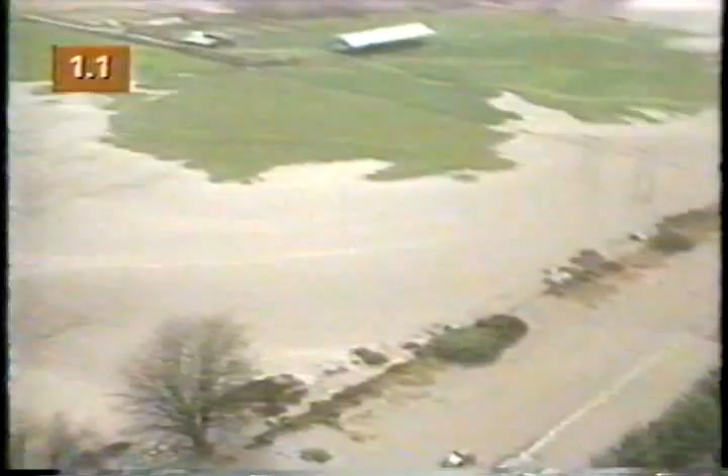Disasters are the most dramatic causes of soil erosion. Many tons of soil can be washed away and carried downstream. Trees and plants which hold the soil in place are torn up by wind and floodwater. We see vast areas of forest land destroyed by firestorms. Such devastation hits the headlines.

Communities and governments jump into action to remediate the damage, and large sums are invested in preventing similar disasters occurring in high-risk areas. Less obvious and less dramatic is the natural erosion caused by the continuing effects of rainfall, wind, and the flow action of streams and rivers. Over time, it has created some spectacular formations. Natural erosion takes place gradually and insidiously. We may never control it entirely.

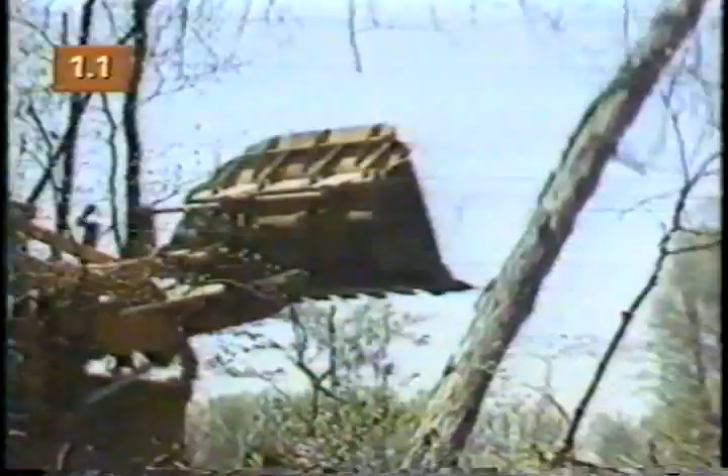Widespread and more rapidly damaging than natural erosion is the additional erosion caused by man. This is the accelerated erosion caused by earth-disturbing activities in agriculture, mining, logging, road building, and new home development. Construction work almost inevitably involves land clearing, which leaves the soil disturbed, stripped of vegetation, and therefore susceptible to erosion. It is accelerated erosion that is our greatest concern, as it depletes our life-depending soil.

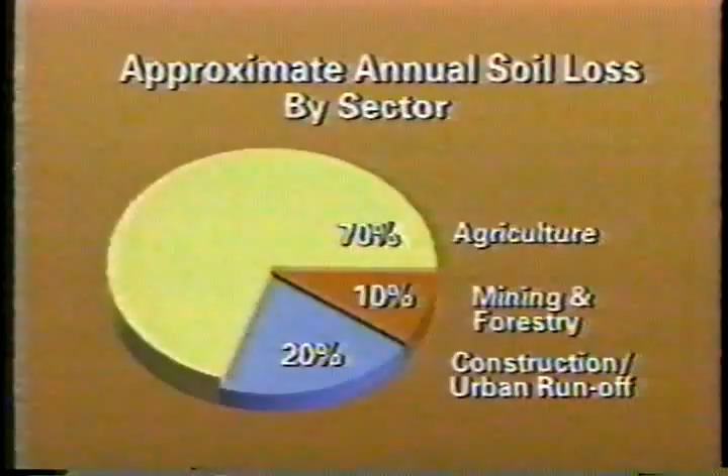The U.S. Department of Agriculture Soil Conservation Service estimates that 3 to 4 billion tons of soil a year are lost from United States land through erosion. Of this total soil loss, 25 to 30% comes from non-agricultural sources. Although construction is not the largest contributor in terms of volume, the rate of runoff from construction sites can be the highest of all land-disturbing activities, and so can the rate of soil loss.

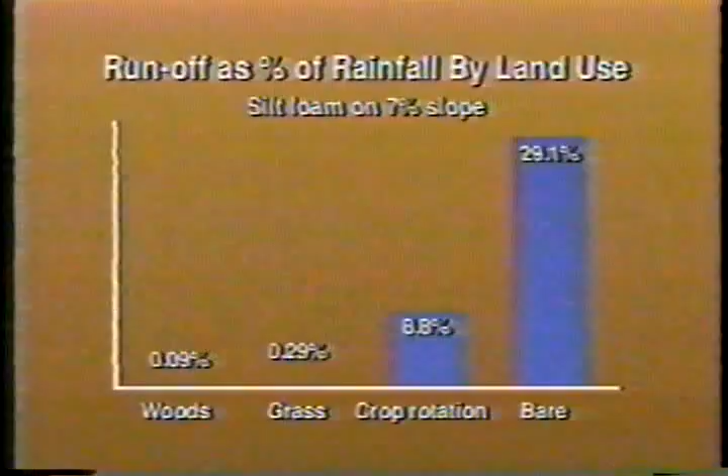Erosion on such a scale reduces the soil's ability to support vegetation, the source of food, oxygen, and building materials. It also threatens wildlife habitats and recreation areas. Sediment resulting from erosion provides a substrate for toxic chemicals, which are carried into water supplies. Sediment accelerates the siltation of waterways and navigable waters. Dredging these costs the U.S. Army Corps of Engineers about $500 million each year.

The EPA estimates as much as $13 billion of taxpayers' money is spent on mitigating the off-site impacts of erosion every year. Not surprisingly, developers, cities, agencies, or other land-disturbing groups may now be faced with large costs to comply with tightening federal and state regulations. Obviously, it's preferable and more cost-effective to control erosion than to pay for its consequences. In this video, we shall look at the erosion process and then at established practices for its mitigation.

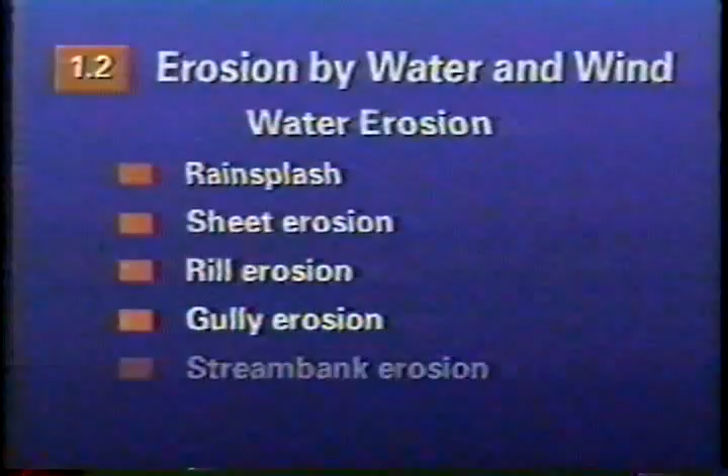Erosion occurs where soil particles are detached by the actions of water and wind. Eroded material is suspended in water as sediment and deposited through sedimentation. There are basically 6 types of water erosion: rain splash, sheet erosion, rill erosion, gully erosion, stream bank erosion, and mass wasting. Rain splash is the most important detaching agent. Raindrops striking a bare earth surface break up aggregates and dislodge soil particles.

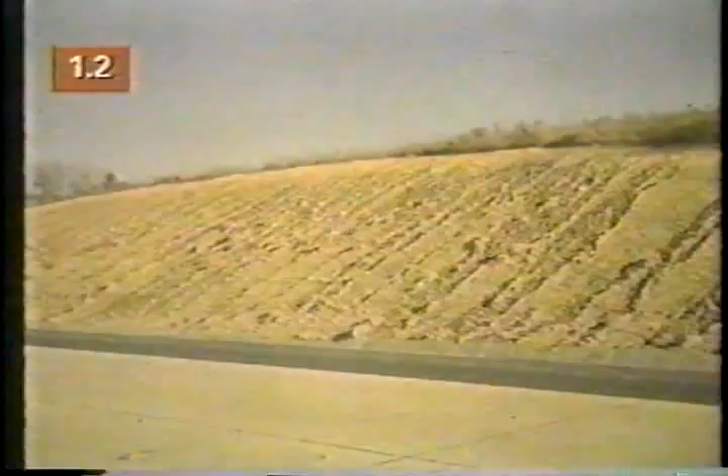Sheet erosion occurs as runoff water moves across the surface of the ground, detaching a thin, uniform layer of soil. While often unnoticeable, sheet erosion is a common and very significant form of erosion. Excessive runoff and steepened topography may produce a network of small channels called rills. Research suggests that rill erosion accounts for the greater part of sediment carried down hillsides. But rills are ephemeral and can often be eliminated by good surface treatment. Left untreated, rills can develop into deeper channels, forming gullies.

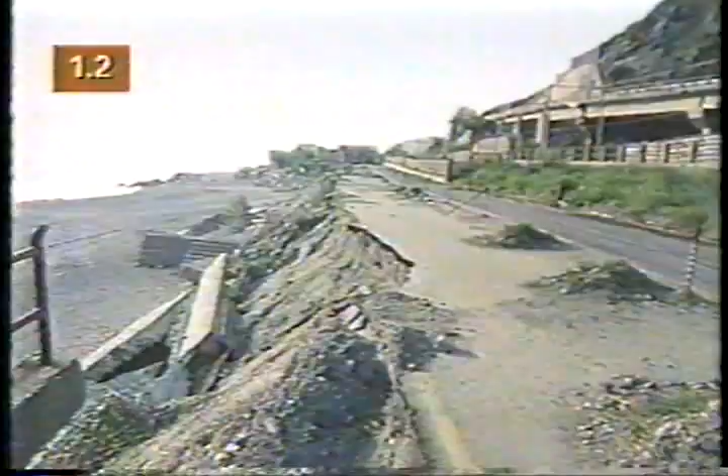Tributaries and stream banks are particularly vulnerable to erosion, especially where the velocity of the flowing water is high and the resistance of the bank materials low. Landslides, mudslides, or mass wasting of shorelines, although less frequent, transport great quantities of sediment into water bodies. From rainfall splash through mass wasting, the amount of water velocity and energy increases. This means the methods used to control erosion are going to be more extensive and more expensive. Erosion is more easily controlled at the low energy types: rainfall, sheet, and rill.

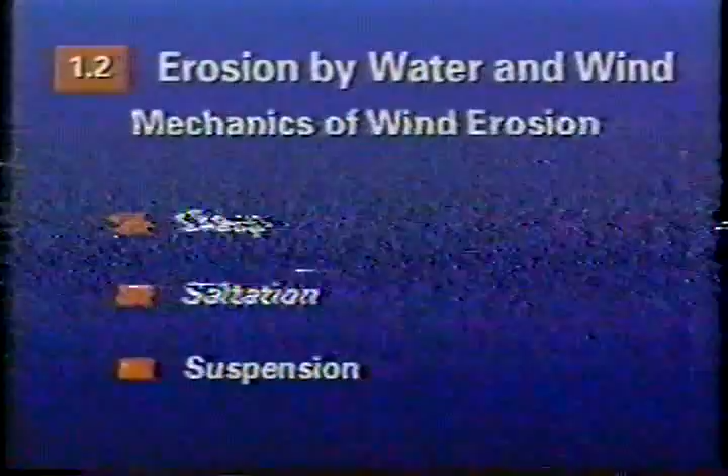There are three mechanisms associated with wind erosion. Coarser grains roll along the surface in an action known as creep. At higher wind velocities, they bounce along the surface, saltation. Finer particles, silts for example, are picked up and resuspended in the air for longer periods of time. Methods to prevent soil erosion or reduce sedimentation are known as conservation practices or best management practices, often referred to as BMPs.

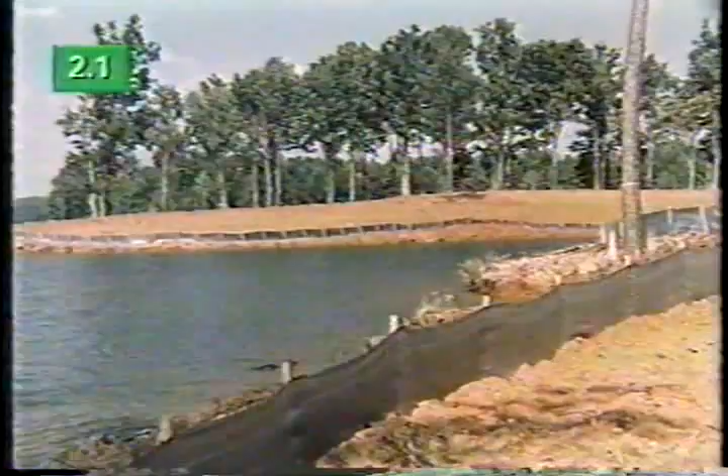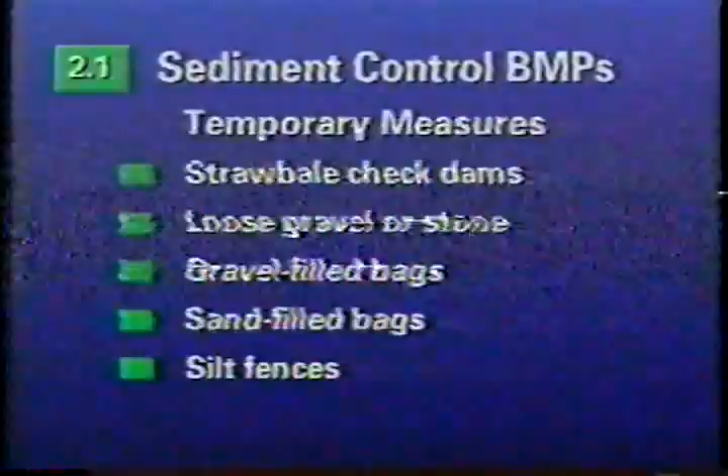Once erosion has occurred, sediment is produced. Temporary methods to control sediment include straw bale check dams, loose gravel or stone, gravel-filled bags, sand-filled bags, geotextile silt fences. Straw bales are one of the oldest practices for controlling sediment, but to be effective, they must be installed correctly and then be inspected and maintained. Bales should be trenched in place, placed on their edges, with the ties off the ground and staked with wooden stakes.

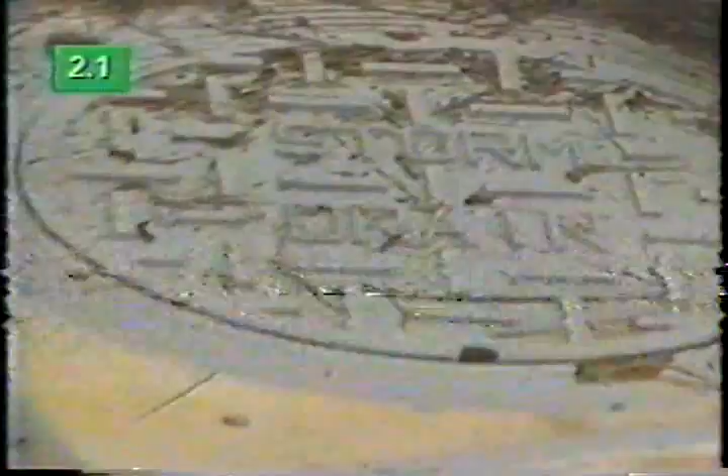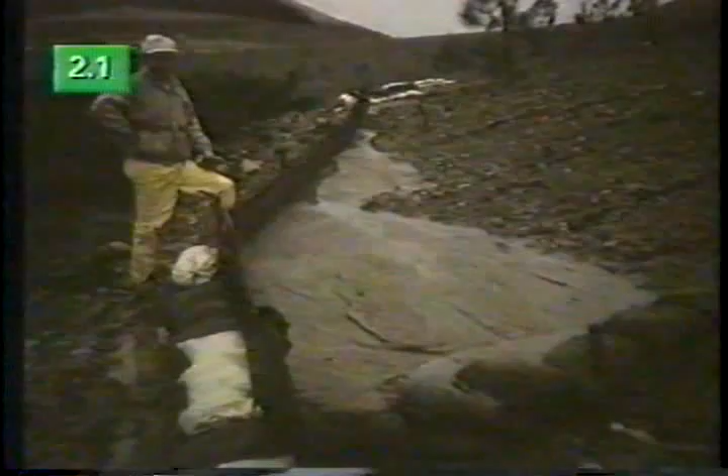Gravel inlet filters can be constructed using cinder blocks laid on their sides, with the open area covered by a screen. Gravel is then placed against the screen to let water pass through, while the sediment is retained. Burlap bags filled with gravel allow water to flow through and the sediment to settle out behind them. The loosely knit system of bag and gravel serves as a filter. On the other hand, geotextile bags filled with sand are effective in blocking the flow of water, but less effective in allowing the water to percolate through.

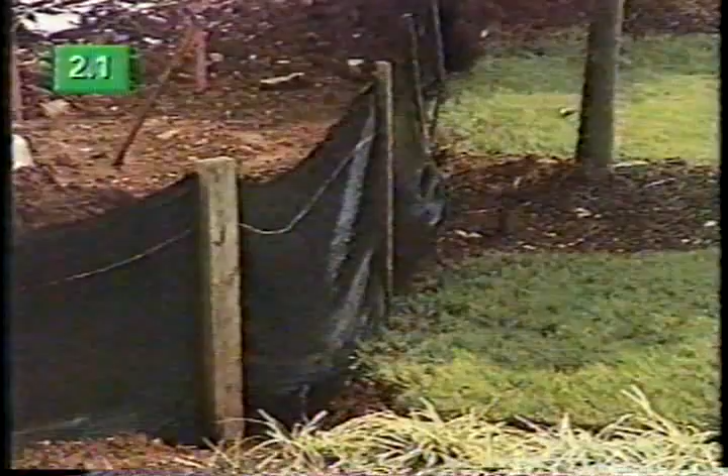Geotextile silt fences are designed to reduce soil sediment runoff. This one from Amoco is made of woven, inert polypropylene and is self-supported by wooden stakes. Water is allowed to filter through, while suspended sediment particles settle out behind the fabric, preventing soil movement from the site.

Silt fences must be installed according to manufacturer's instructions to prevent sediment flowing underneath. This involves digging a trench, burying the bottom of the fabric in the trench, and backfilling it. For inlet protection, they may need reinforcement.

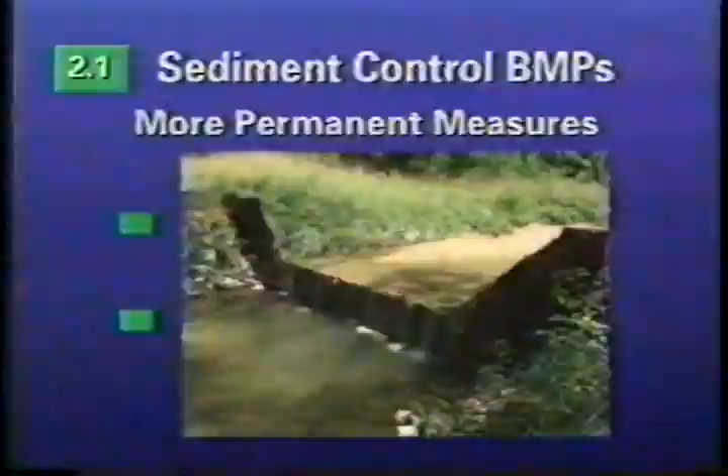More permanent structural methods of sediment control include check dams constructed from logs, rock, concrete, or gabions, all designed to reduce runoff velocities and trap sediment. Detention ponds hold stormwater and release it slowly. Retention ponds hold water for longer periods, allowing sediment to settle out. Catch basins are good practice on a construction site.

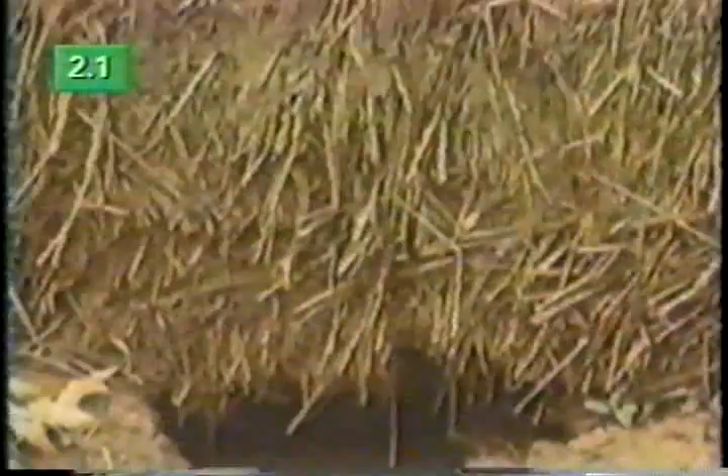As with all sediment-control BMPs, continued maintenance is necessary for their efficient operation. This means periodically removing and distributing or disposing of accumulated sediment. Keeping soil in its place and out of sedimentation devices is erosion control. And the simplest, most cost-effective measure to control erosion is to maintain a cover on the soil surface. The most effective way of accomplishing this is by establishing vegetation.

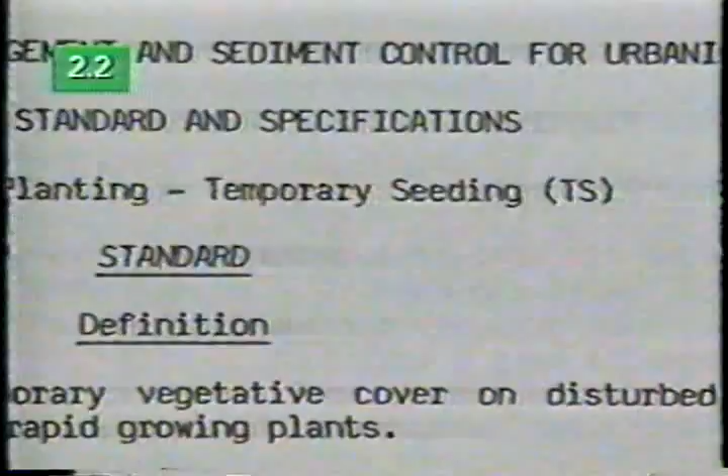Vegetation has three main functions: to intercept and reduce the energy of rainfall impact, to reduce runoff velocity, filter out sediment, and increase infiltration of water into the soil, and to hold soil in place with roots. Certain procedures should be followed, including the addition of fertilizer and soil amendments to promote vegetation establishment. These procedures should be based on the results of a soil test and related to the type of vegetation selected for long-term establishment.

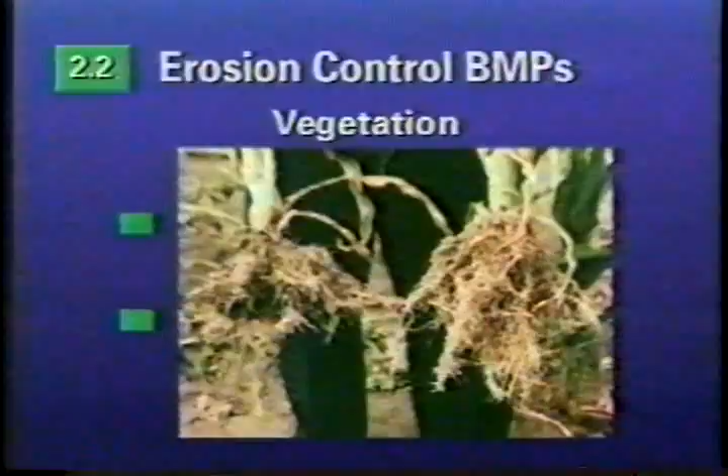Sometimes the soil's limitation to grow vegetation is related to its structure. This is the case with soils underlain with impervious layers or hardpan, which restrict root development. Mechanical means, such as deep ripping, can be used to break up compaction, but at least one chemical method, Agri-SC from 4-Star Services, has been demonstrated which makes compacted soils friable and moisture in the soil more accessible to plants. This soil treatment is relatively inexpensive and can be applied by any conventional agricultural spray equipment.

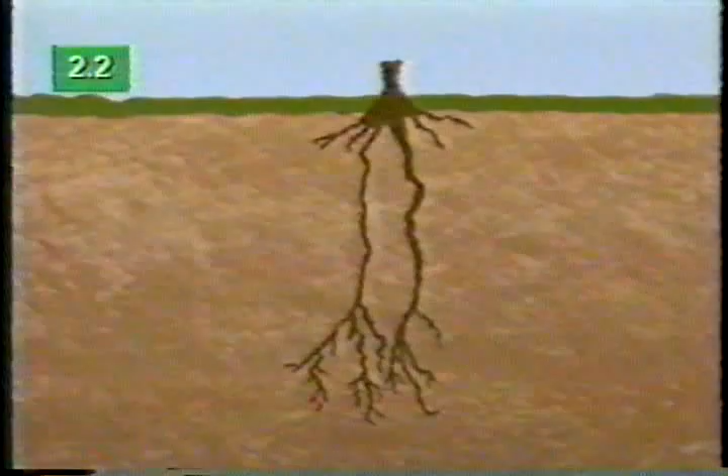Soil bioengineering is the practice of using trees, shrubs, and other living plant material to structurally reinforce the soil. These need careful selection. If erosion is deep-seated, those with long roots will give greater support. If erosion is superficial, those with matted shallow roots will be preferred. When mature, the canopy can protect soil from rainfall, while the roots hold the soil fast.

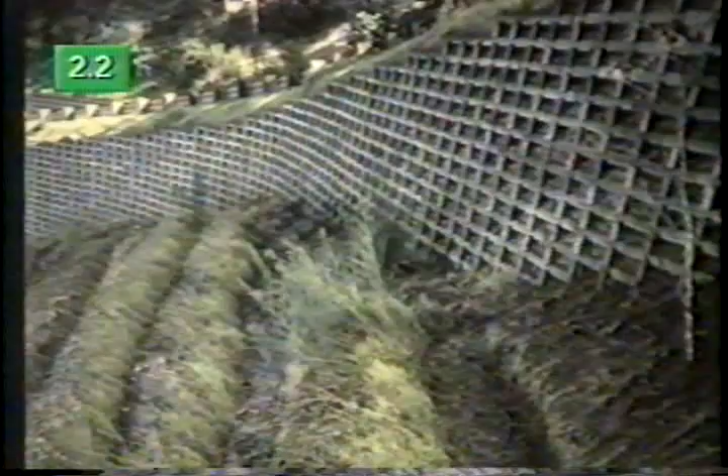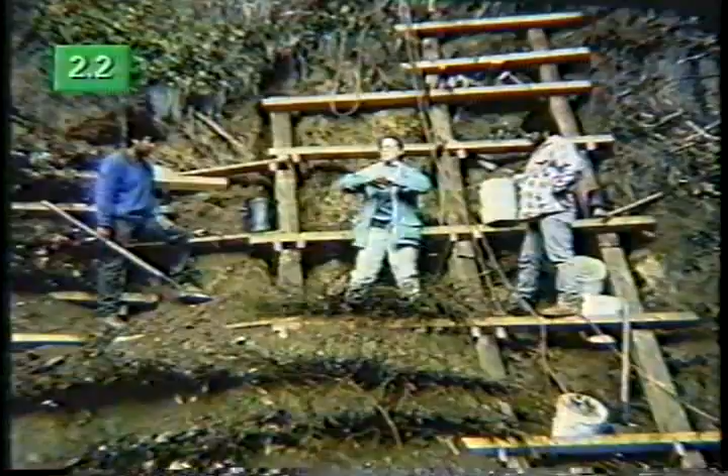A traditional way of controlling shallow erosion is live staking. Typically, willow stakes cut from dormant plants grow well in moist soil, and some thrive on road fills or along gullies. Traditional wattling also makes use of available materials. Cigar-shaped bundles of quickly rooting live brush can be staked in shallow trenches cut at intervals on contour. Stakes can also be of live material. Biodegradable geotextiles can also be incorporated into the system, along with grasses and other plants. In soil bioengineering, materials may cost little, but it is skilled work and labor-intensive, and periodic inspection and maintenance are essential.

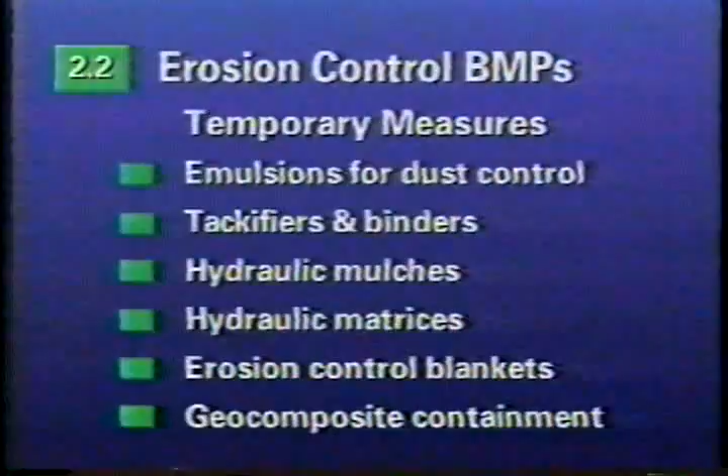Temporary erosion control measures are often necessary to protect the surface. These include emulsions for dust control, tackifiers and soil binders, hydraulic mulches, hydraulic matrices of composite materials, erosion control blankets, and geocomposite containment systems. Usually as a measure against wind erosion, organic byproducts or acrylic polymer soil stabilizers seal the surface or bind soil particles into aggregates. Wind-blown sediment can be a major violator of clean air laws.

Coal dust from this storage pile is being treated with Soil-Sement, a binder made of a blend of acrylic and polyvinyl acetate made by Midwest Industrial Supply. The binder produces a pliable surface resistant to wind action. Another application for Soil-Sement is to control erosion and dust in desert areas. After the final grading and stabilization, rain will not destroy the grading along the firm surface so long as the soil sealant remains intact.

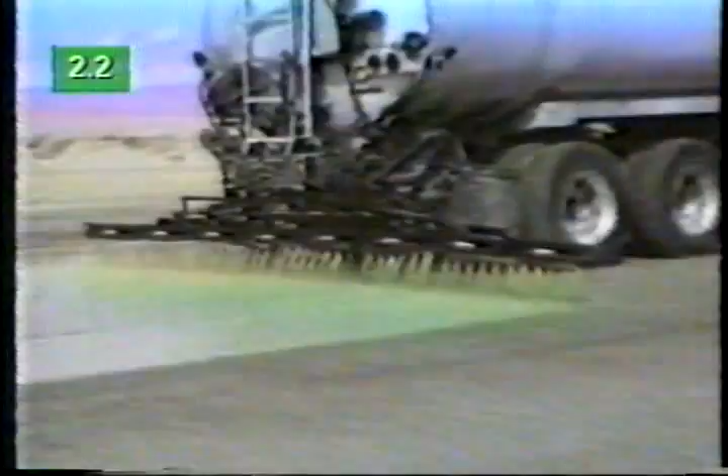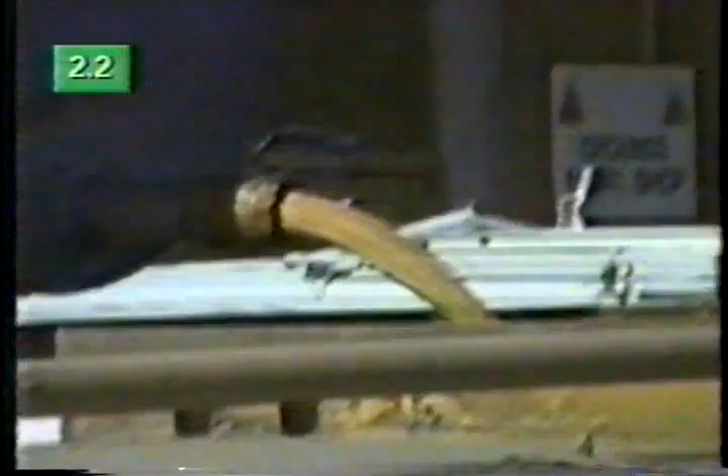Dust on unsurfaced roads, like this mine haul road, or helipads and airstrips, is not only a problem, but a safety hazard. Here we see Road Oyl, a soil stabilizer from Soil Stabilization Products, being used to provide a strong bonded surface. This is more economical than asphalt and more rapidly applied. Road Oyl is an emulsion made from modified natural resin, which is added to water and diluted according to application needs. A single coat sufficed to stabilize the helipad, but several coats were applied to the landing strip.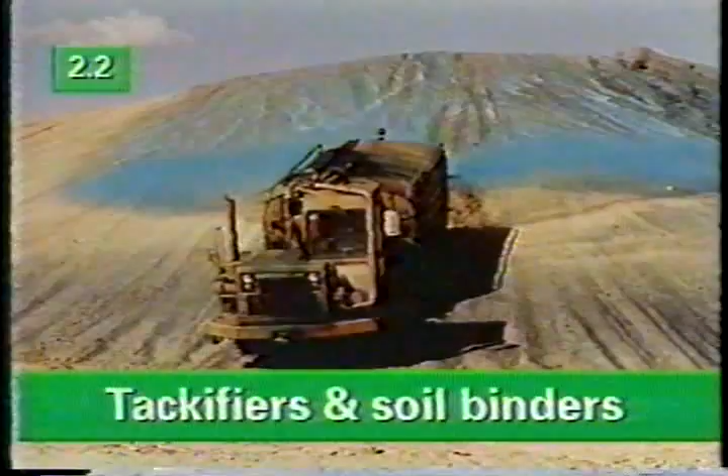Here we see a dyed liquid copolymer binder being sprayed to hold down the fly ash from the nearby coal generating station. This product is Soil Master from Environmental Soil Systems. When it's mixed with water, it bonds with the ash particles to form a water-resistant membrane which stabilizes the surface against wind erosion.

On quite a different site, this binder is used to prevent the sand from blowing onto the main highway. It was also used to stabilize the nearby dunes. With this device, the Soil Master stabilizer was sprayed on copper mine tailings. When diluted with water, binders can be used as tackifiers by themselves or with mulching.

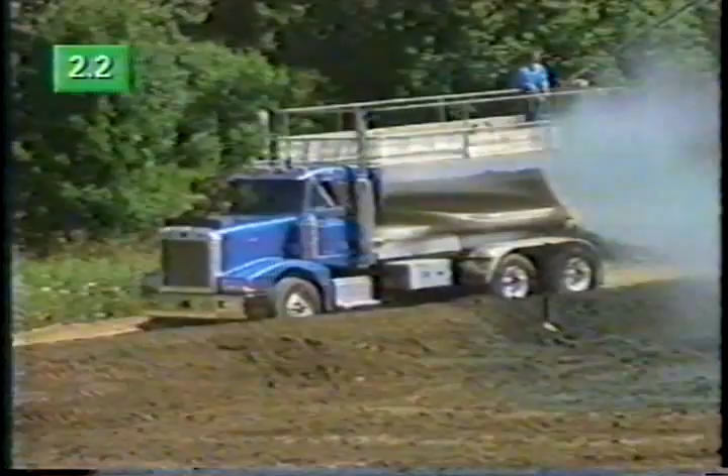Hydraulic mulches can be made of recycled paper, wood fiber, cotton waste, or other biodegradable materials. This is an economical way of delivering seed, mulch, and fertilizer. Mulch also protects the surface from rainfall impact, increases moisture retention in the soil, and moderates soil temperature.

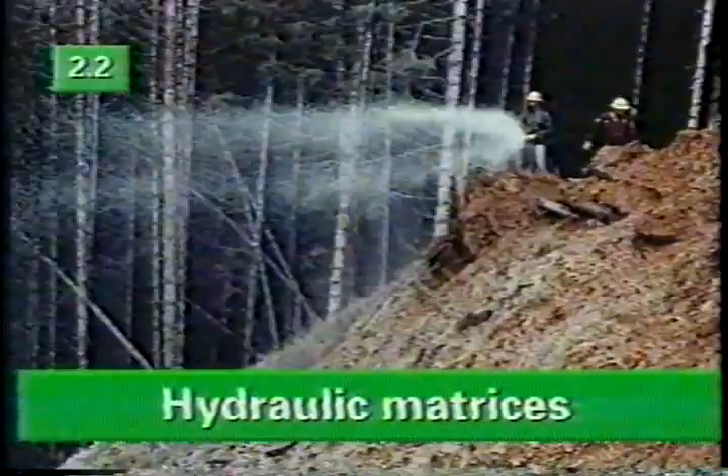In some erosion control projects, specifications call for a particular blend of materials. Hydraulic mulches, soil binders, and other amendments may be combined to produce a composite matrix, which is hydraulically applied with seed to provide a high level of protection.

A typical example is the emergency erosion control effort following the Oakland, California firestorm. Here, a combination of recycled paper mulch, wood fiber mulch, acrylic copolymer, and seed was applied to over 500 acres of the burn area, with successful results.

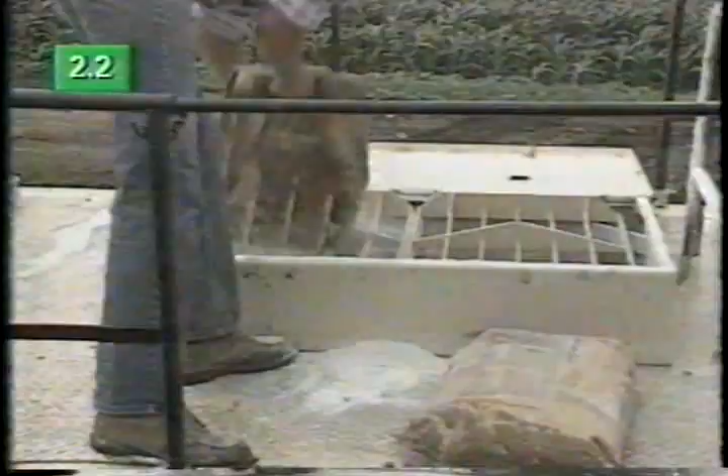Another example of a hydraulic matrix used here on a landfill is Airtrol, natural U.S. gypsum plaster, which can be mixed with seed, fertilizer, and water to form a cementitious binder. This matrix provides a protective crust-like cover of about 1/4 of an inch, which controls water and wind-induced erosion and holds seed in place. The matrix retains moisture in the soil and lowers soil temperature.

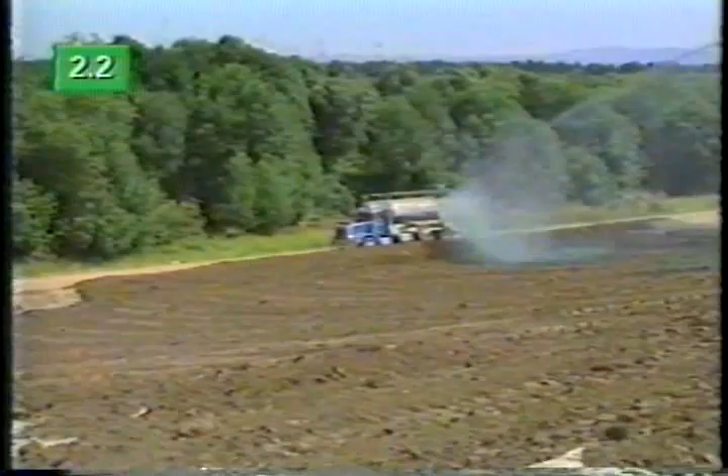Applying seed, fertilizer, control emulsions, tackifiers, soil binders, hydraulic mulches, and matrices requires specialized hydraulic seeding machinery. Although the principles of application are simple, equipment has become quite sophisticated. GeoQuip's hydroseeder boasts quick-release camlock hose couplings as a precaution against clogging, and a built-in fresh water tank so the main tank can be flushed out on site.

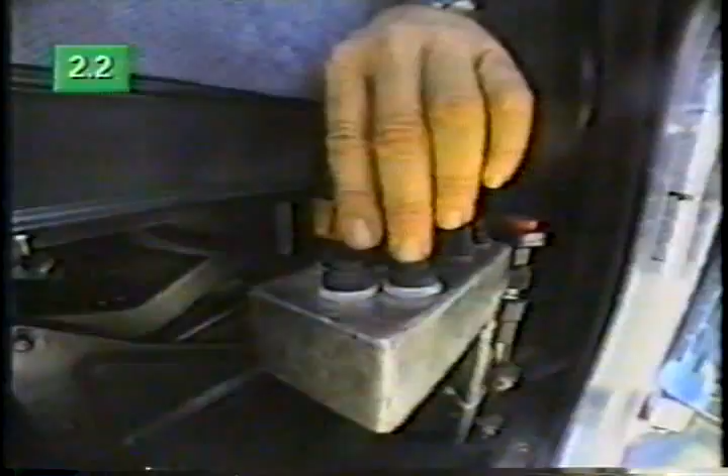The driver can run the side hose through electronically controlled hydraulics. Looking through his rearview mirror, he can see the nozzle, aim it, and conduct the operation himself without getting out of the cab. Erosion control blankets are rollout devices, which can be placed in two categories: blankets made of natural, biodegradable materials, and blankets made of synthetic, non-biodegradable materials.

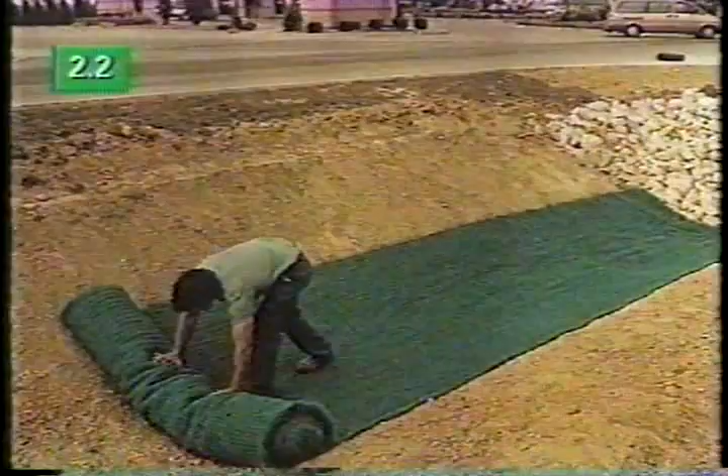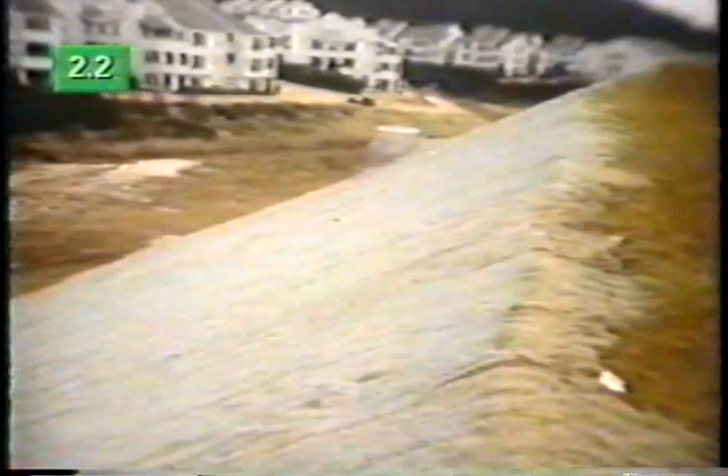One of the oldest forms of erosion control blanket is of natural jute. Belton's GeoJute is an open weave fabric which allows light to enter and plants to grow through it. Like most blankets, jute is stapled to the ground with staples, pins, or wooden stakes. The blanket drapes to follow the land contours and lasts while the vegetation establishes itself before it degrades. The open weave allows hydroseeding to be applied after as well as before installation.

Coir, woven coconut fiber, is another natural material used in the erosion control industry. We are looking at GeoCoir DeKoWe, again from Belton. It can be woven into different weights and meshes. Much tougher than jute, coconut fiber lasts from 4 to 10 years before it degrades. Coir can be used to support stream embankments and channels and to hold the seeds in place until the plants take over the support.

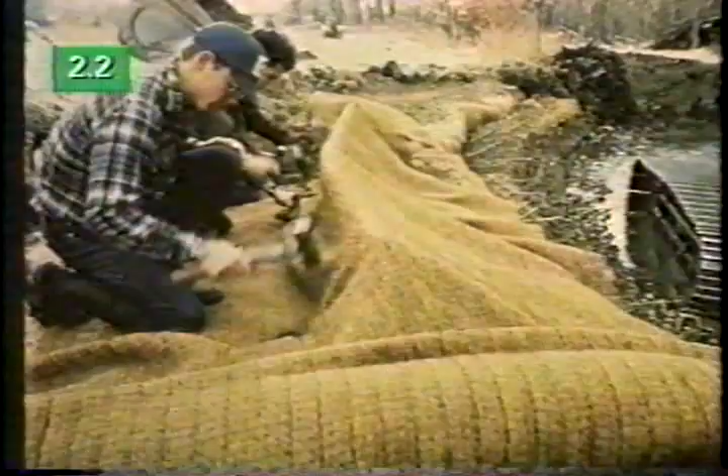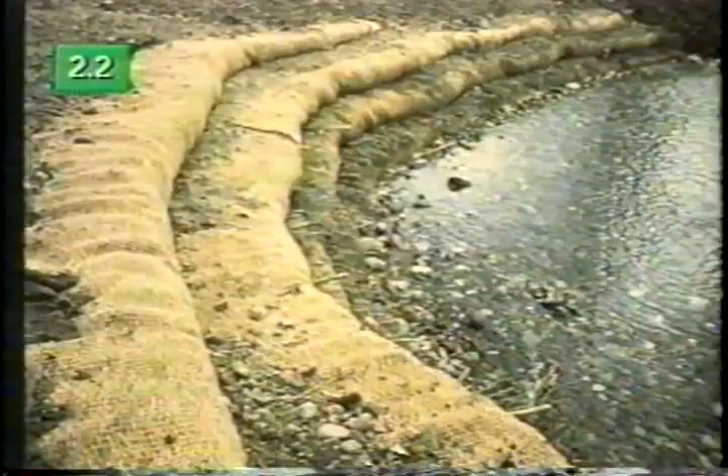Here, a high-strength coconut fiber geotextile from Bonterra America is used in the construction of a retaining wall which follows the bends in a stream. Using a plywood form, the wall is constructed in 18-inch lifts, extending 4 feet into the bank. Willow cuttings to be planted through the fabric will be well established by the time the product degrades.

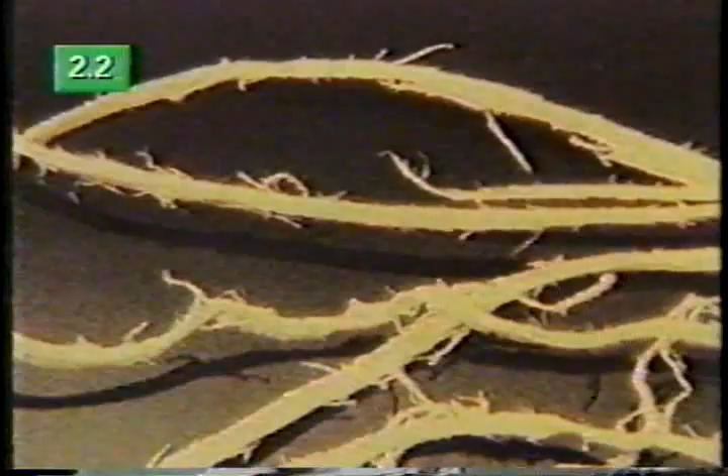This Curlex blanket from American Excelsior, at work on a holding pond, is made of curled wood encased in a photodegradable plastic netting. The wood fibers control erosion and promote growth by holding the seed in place. In this application, the contractor made plantings through the material after installation.

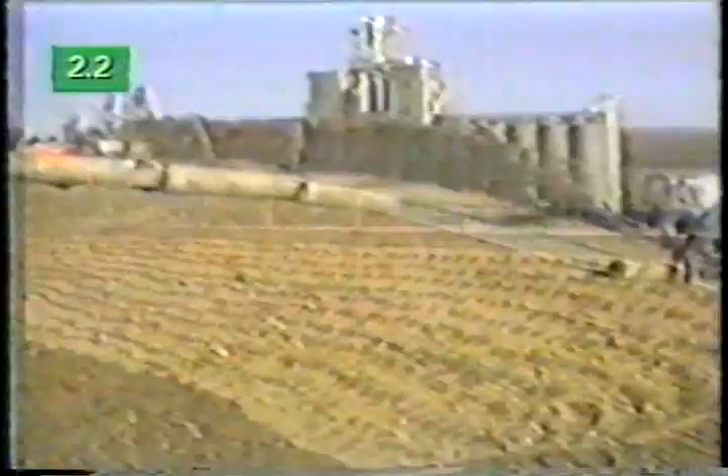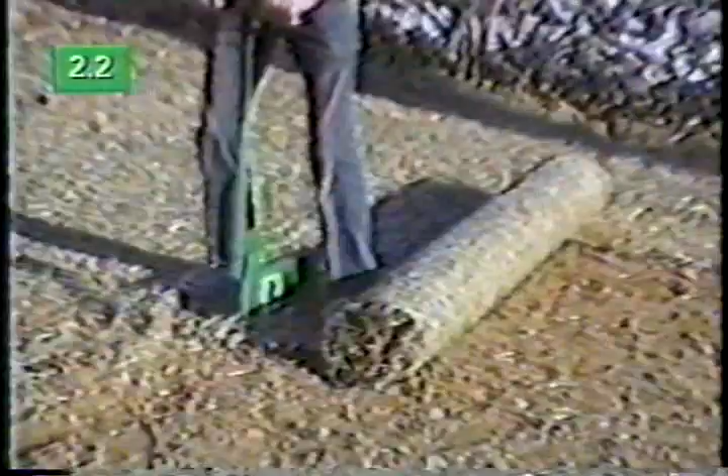Installing erosion control blankets is a relatively fast and unskilled operation. These North American Green straw blankets are being used to cover an embankment. While on this 80-foot slope, double-netted straw blankets have been installed to prevent erosion and sediment deposition on the railway lines below. Here, blankets laid on landfills have been revegetated to prevent underlying drainage systems and trash being exposed.

In this application, erosion control blankets were used around the site of a new supermarket. Two grades of Bonterra erosion control blankets were selected. A straw blanket was placed initially and then covered by a heavy woven coconut fiber geotextile. This was because the site was steep and exposed to frost shear and severe winter weather. The greening began with the arrival of spring and the wildflowers that were part of the specified seed mix.

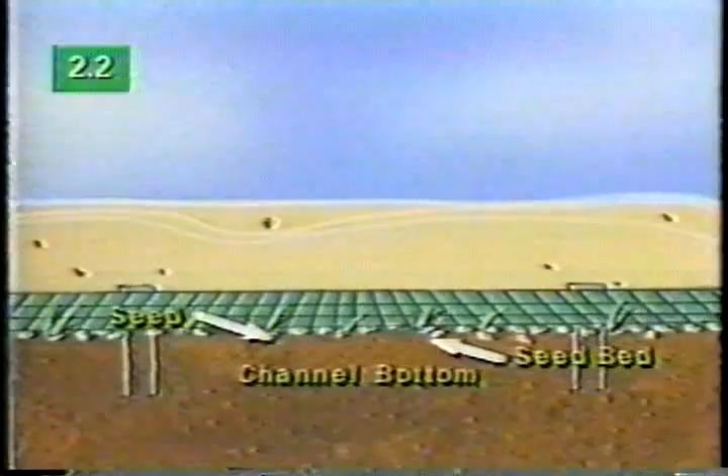This blanket from North American Green is not constructed of natural fiber. It is a synthetic flexible channel liner designed to remain as a protection against scour on the channel bottom. Laid over the seeded channel bed, the liner protects seeds and soil from being eroded by water flow. Once established, the roots remain entwined in the non-biodegradable mesh.

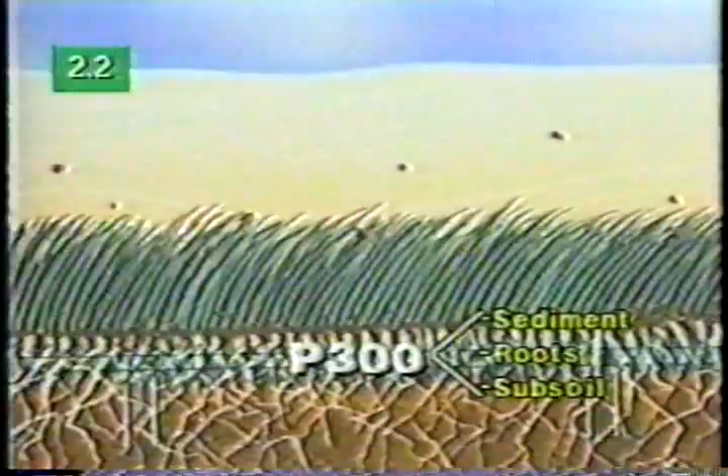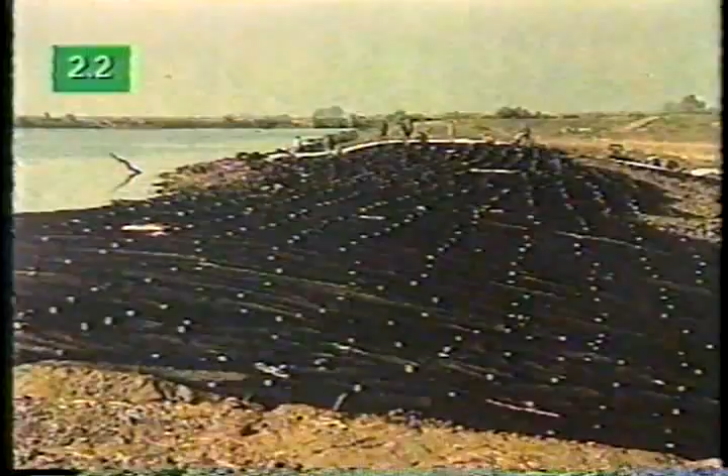On the shore of this dike, ripe barley has its roots anchored in Akzo Enkamat, a 3-dimensional matting of heavy nylon monofilaments fused at their intersections. 8 months before, this matting was pegged down on badly eroded earth, seeded, and filled with friable topsoil.

Enkamat is a root reinforcement matting, which also resists the shear forces created by high-volume discharges. It is used to promote vegetative cover, to slow water flow, and control erosion in ditches and stormwater channels. It is also installed on embankments and other steep slopes for hydroseeding.

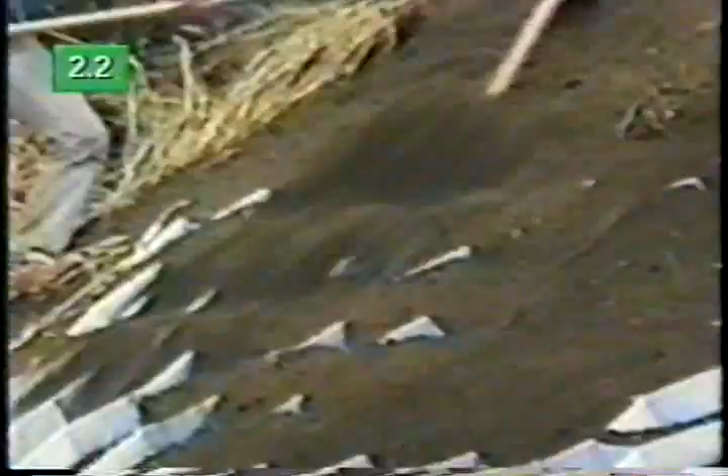Wherever greater stabilization is necessary, cellular geocontainment systems can be used. Seen here is Akzo Armater, a 3-dimensional semi-rigid matrix made of non-woven polyester fabric. The cells can be filled with soil, sand, or aggregates according to the application. On this site in British Columbia, the cells are filled and planted with native spruce and pine trees.

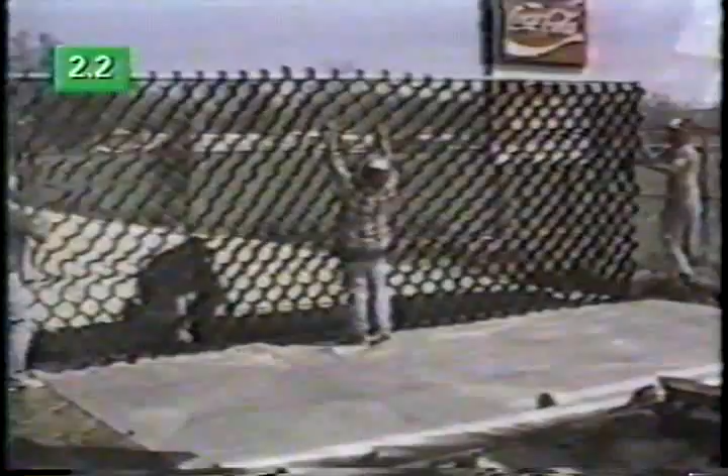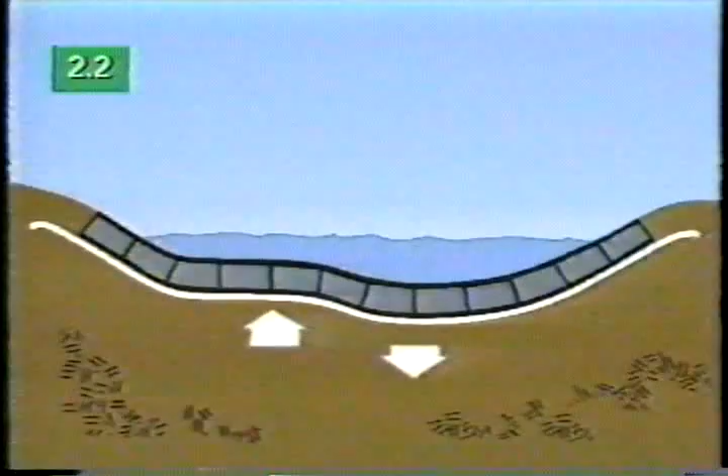GeoWeb from Presto is a containment system made from welded polyethylene plastic strips. Again, sections are flexible for transportation and placement, but once filled, the 3-dimensional cells confine and reinforce the fill to form a structural composite. The cellular structure will conform to contours, but prevent flanking or movement of the infill. Cell walls allow normal drainage, but hold the infill material in place, forcing water to flow over the protective system to prevent erosion.

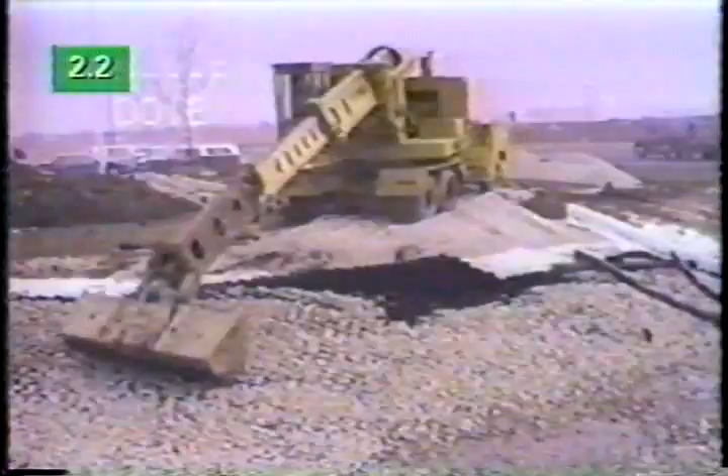For low water flow velocities, the infill can be of native soil, later vegetated to give natural cover. For medium flow velocities, in channels for instance, infill can be of crushed rock. When using geocomposite containment systems, most channel installations require a geotextile to be laid between the substrate and the composite. Where there is hydrostatic pressure, the geotextile directs the water to open cells that have been filled with gravel, allowing the water to drain into the channel.

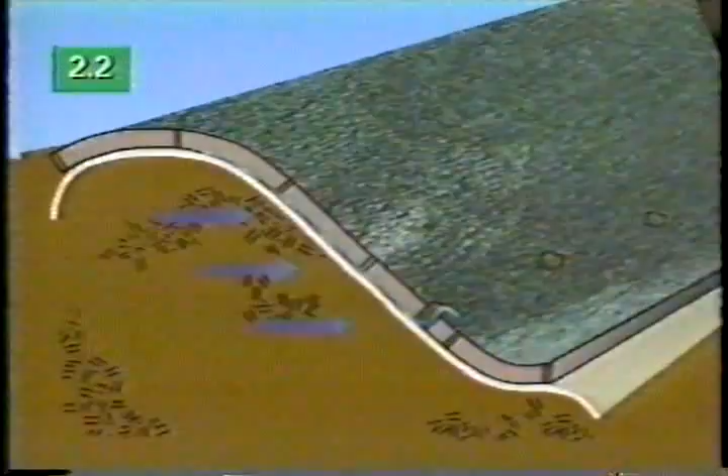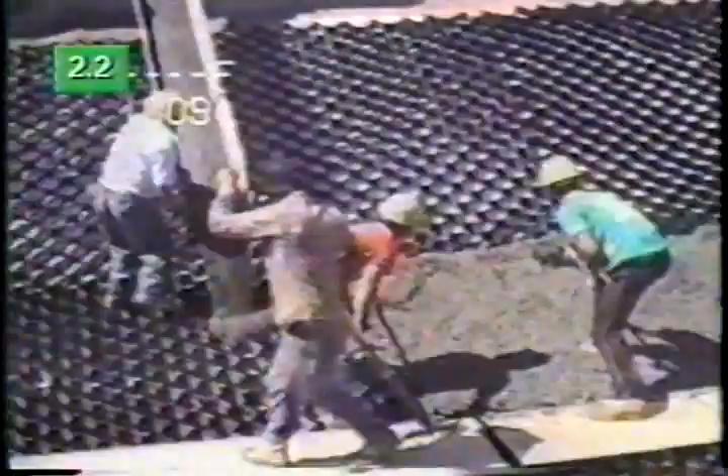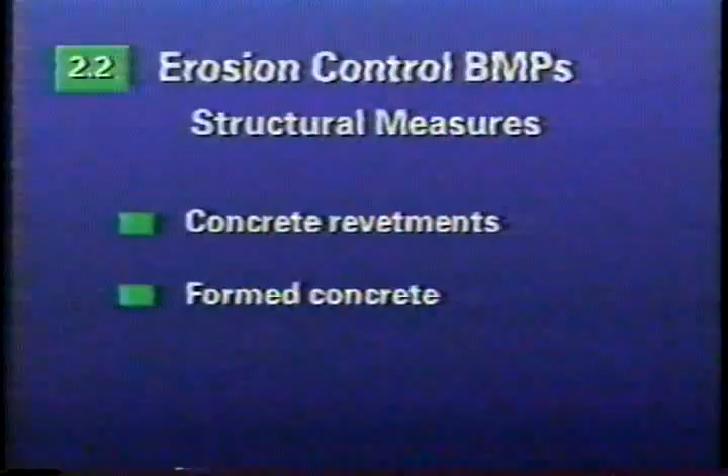When concrete fill is required to protect severe slopes or channels with continuous flows, ready mix can be discharged directly into the cells. For stream bank stabilization, and in areas where erosion forces exceed the capabilities of vegetation to provide long-term protection, structural methods for erosion control are sometimes necessary. These include precast concrete revetments, formed concrete systems, and wire mesh baskets known as gabions.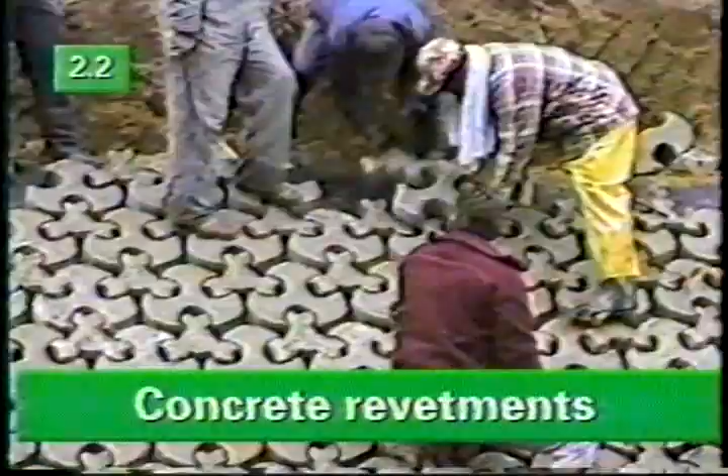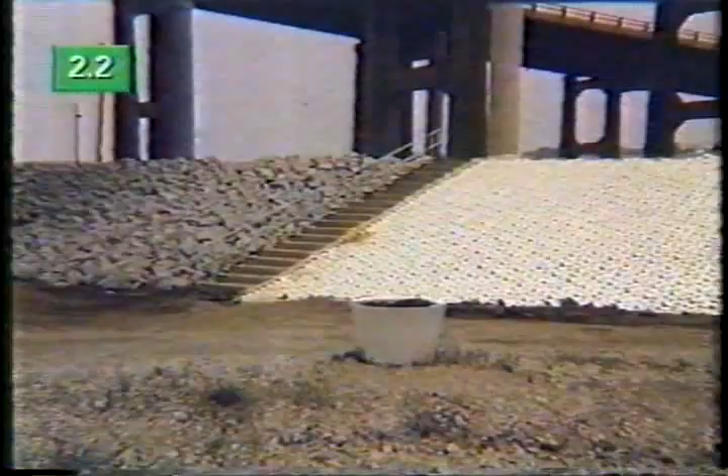This example of an interlocking concrete revetment system is Trilock from American Excelsior. It can be left in its natural form or backfilled with soil and seeded. It can be installed without the use of heavy equipment and can therefore reach inaccessible areas or be used on smaller projects. Concrete block systems like Trilock are considered a more attractive alternative to traditional riprap. Interlocking blocks can be laid on stream banks in sensitive areas and on long, steep slope channels. When laid as a mat, they can allow for below-water applications.

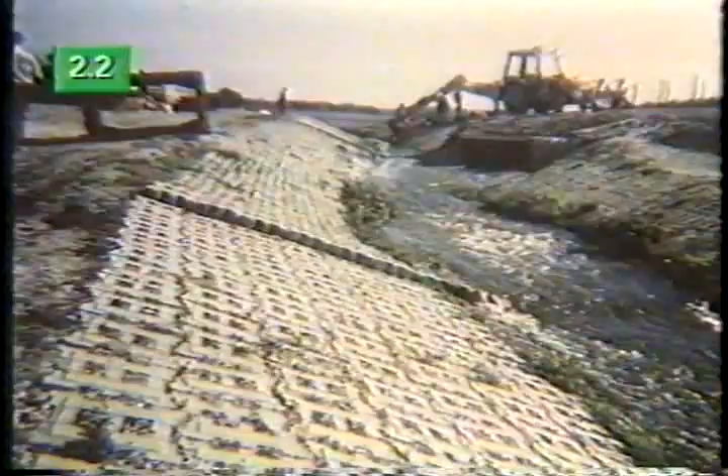We're now looking at another articulated block system, Nicolon's Armorflex. Typically, this is used in moderate to severe open channel flow and wave conditions. It offers long-term structural protection as well as a vegetative surface, which acts to filter pollutants and minimize their discharge downstream. In a wave climate, the open cell blocks are backfilled with crushed gravel, overlying a base drainage medium.

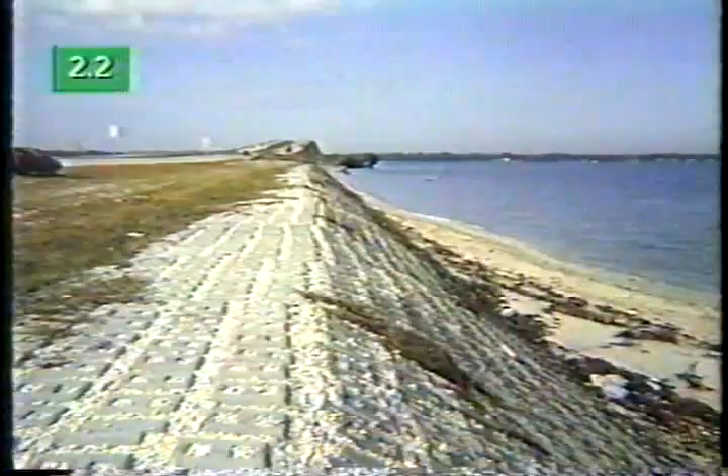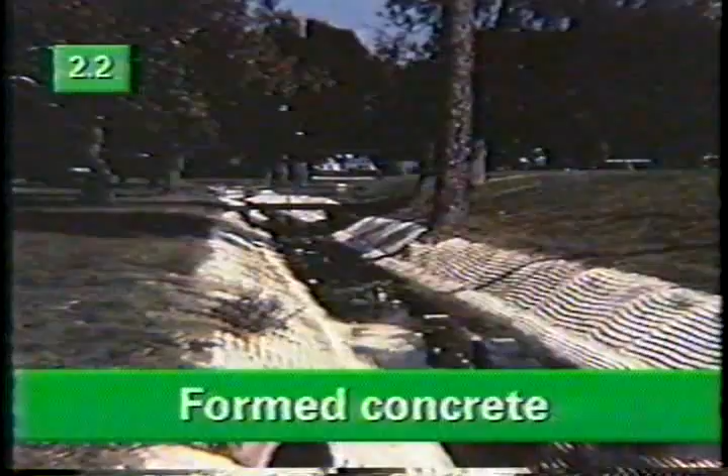A modification of the use of concrete for bank protection is this concept of a fabric-formed concrete revetment system, which is placed over a filter fabric. This is an Armorform system from Nicolon. 2 layers of woven synthetic fiber are formed into an envelope, which, when injected on site with a very fluid fine aggregate grout, sets to form a concrete mattress in minutes. Excess vehicle water is expelled from the permeable fabric forms.

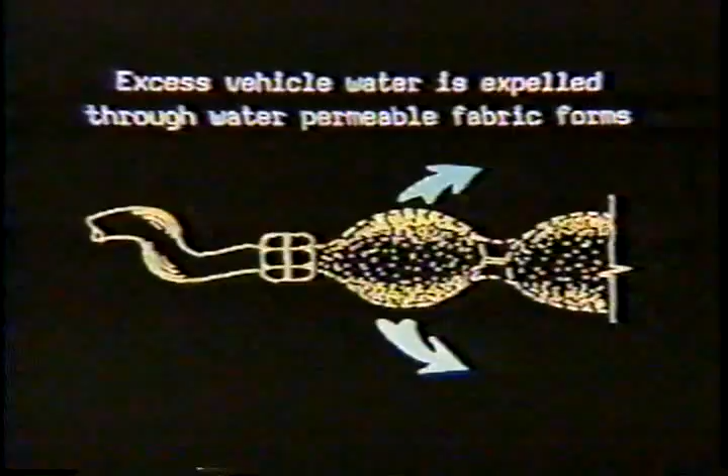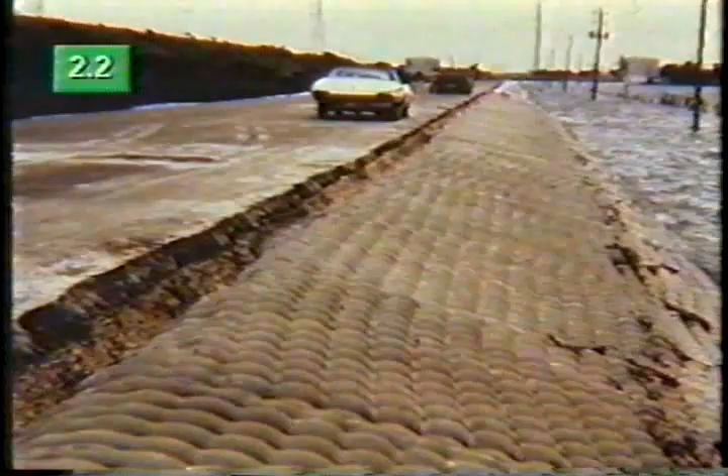Hydraulic uplift pressure may be relieved by inserting weep tubes at specified intervals. Once filled, the fabric has performed its function and is free to deteriorate. The concrete provides the erosion control. As Armorform's rough surface offers high resistance to flow, it is suited to steep gradient flows.

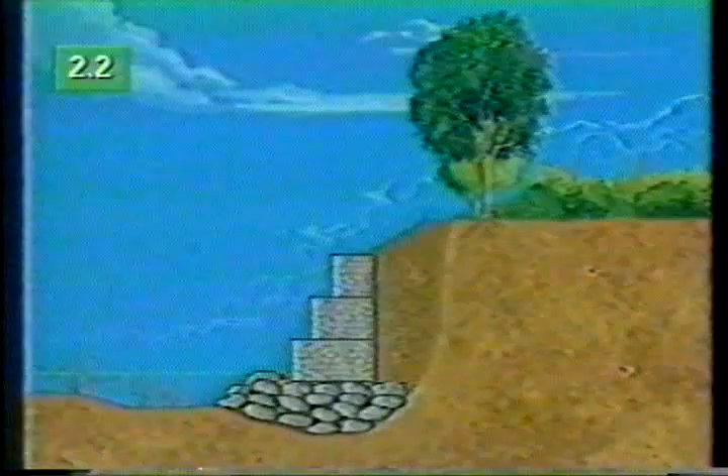Maccaferri gabions are flexible, permeable structures which are designed to adapt to considerable soil movements. They can be laid in dry conditions or underwater. Gabion blocks and mattresses are suited to highly eroded banks, while the thinner revetments of mattresses are typically used for protecting less steep lower banks and for foundation aprons to prevent undercutting.

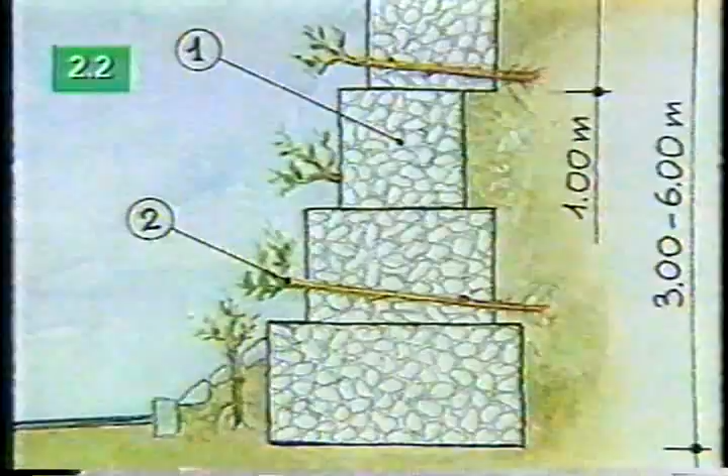Soil and seeds may be introduced into the voids in the stone fill either during or after construction. Plants can be grown in the external steps of the gabion structure or cuttings planted so their roots gradually penetrate through to the soil beneath. Rocky faces covered by a rockfall netting can be hydraulically seeded. Alternatively, a biodegradable mat containing mulch and seed mix can be placed under the wire.

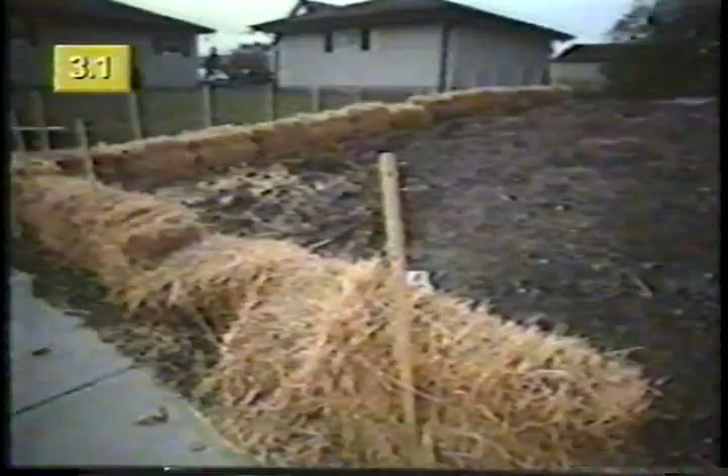As we've seen, measures to control erosion and sediment range from the simple and temporary to the more sophisticated and permanent. There are 6 basic criteria for evaluating the relative merits of a best management practice. Its environmental and institutional acceptance, the cost of material, installation, and maintenance, its erosion control effectiveness, its ease of installation, its ability to promote vegetation, and finally, its operational requirements such as maintenance.

In selecting from appropriate alternatives, we also have to consider the current regulatory environment. So great is the concern about annual rates of soil loss and the sometimes disastrous effects of sedimentation that federal and state laws are putting increasing pressure on land-disturbing industries. Some states have taken a lead in providing positive guidelines, manuals for BMPs, and video instructions for their correct installation.

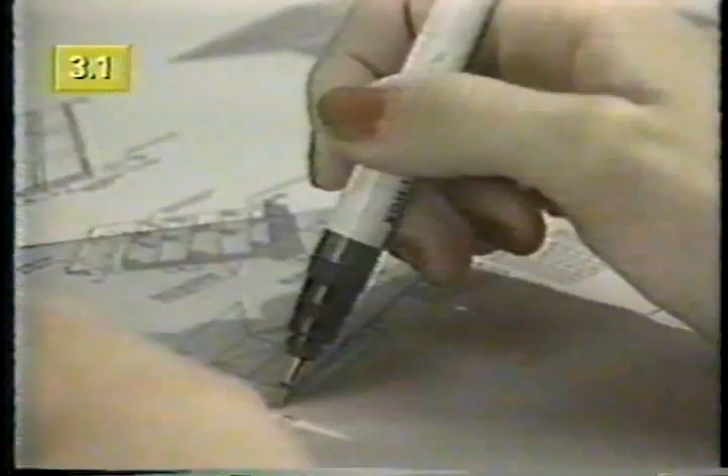If designers and engineers can incorporate appropriate technologies for erosion and sediment control into their planning, they'll be able to offer additional services to clients. Present and future regulations may actually present them with new opportunities, even new professional direction, in taking a lead in the environmental improvement business.